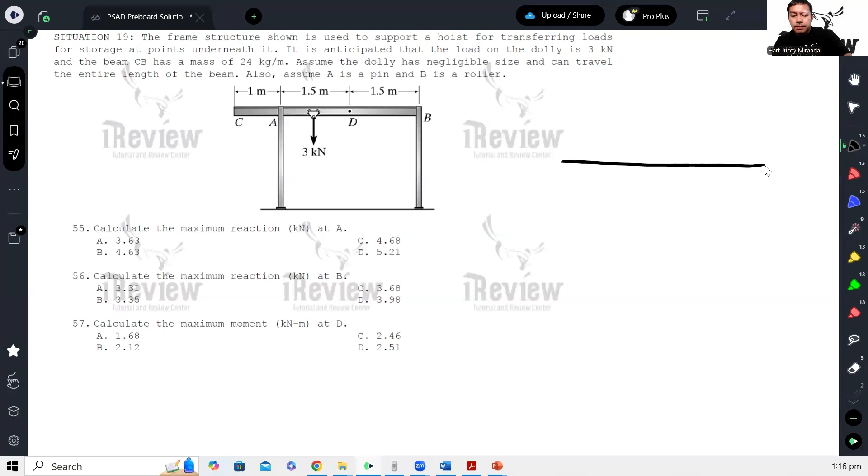So here we have two options. Actually, if you look at the problem, it's very simple. It's just a simply supported beam with an overhang. So let's make this a pin, this a roller. This is A, this is B. The 3 kilonewton load can travel anywhere, so let's place it here for now. We also have to take note that the beam CB has a self-weight.

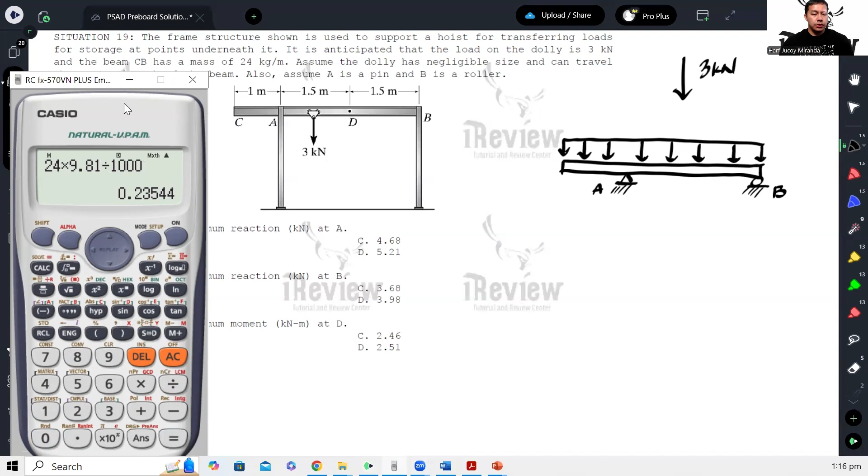That self-weight of 24 kilogram per meter, being a self-weight, should act all throughout the span. So this is 24. Let's convert this to kilonewton per meter: 24 times 9.81 over 1000, which gives us 0.235 kilonewton per meter.

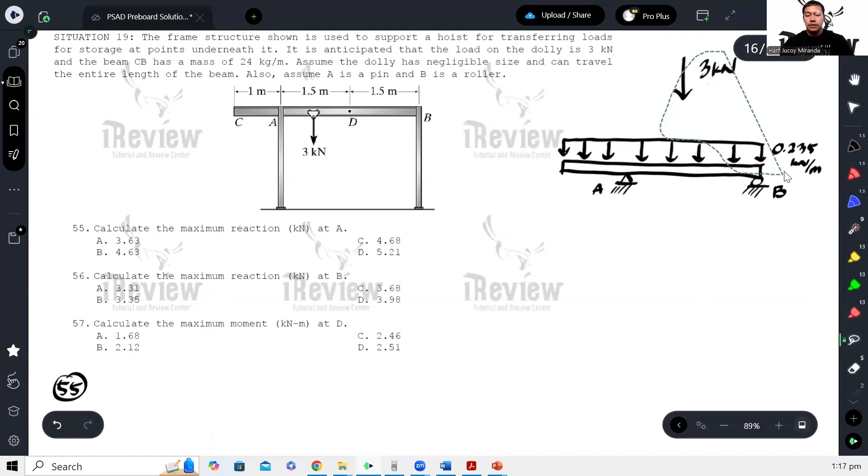Now, calculate the maximum reaction at A — this is for number 55. For the maximum reaction at A, we need this 3 kilonewton load placed directly at A. I'll do this without the influence line for now. To make this maximum, the 3 kilonewton load should be placed right at A, so we're sure we produce the maximum reaction at A there.

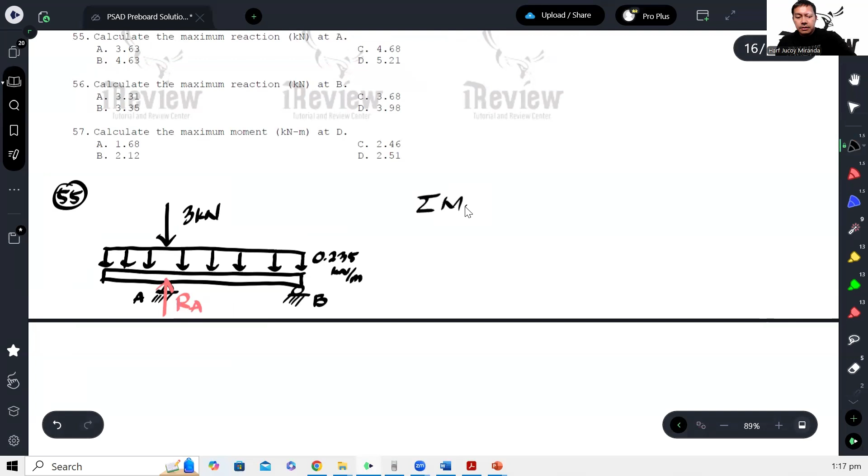So how do we calculate the reaction at A? We can take moment at B. Summation of moment at B equals 0, assuming counterclockwise positive. That would be 0.235 times the full length, which is 4 meters, times its moment arm — the resultant is at the middle, so 2 meters from B. Plus 3 kilonewton with moment arm 3. And then minus reaction at A with moment arm 3 also, equals 0. From here we can calculate the reaction at A.

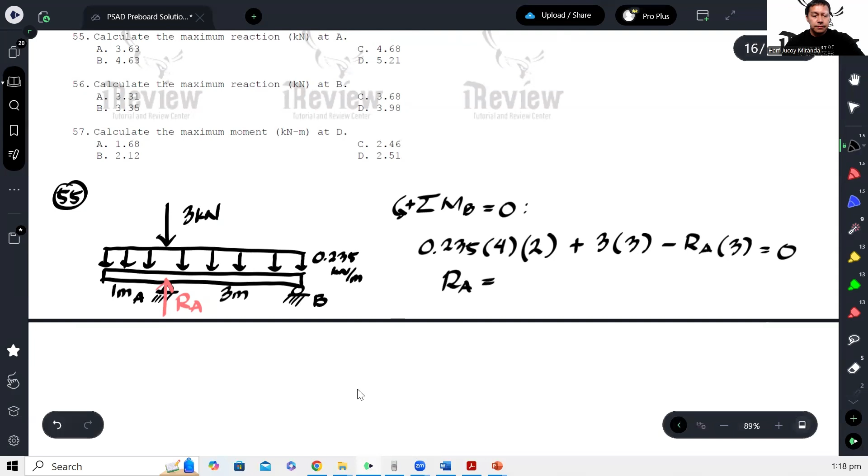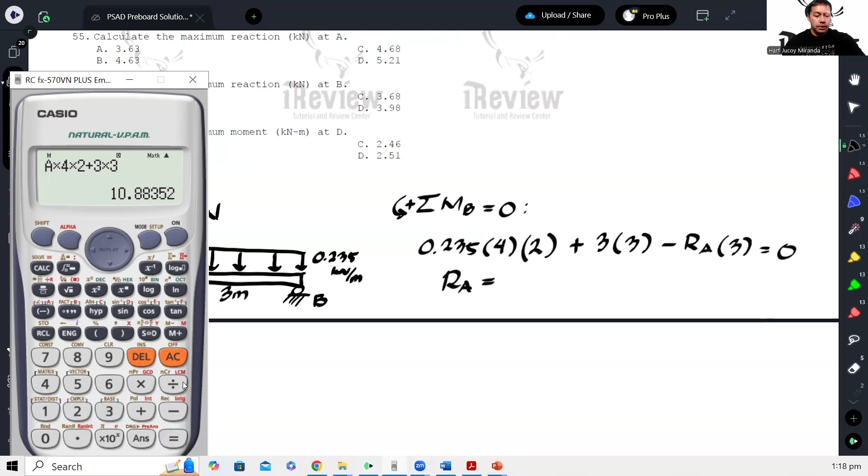So that's 0.235 times 4 times 2, or let me just store this. Store it as A: A times 4 times 2 plus 3 times 3, over 3. That gives us 3.63 kilonewtons — that is the maximum reaction at A.

Now if you're curious, what if I want to use the influence line instead? That's also possible. The influence line for the reaction at A — I discussed this in a different video, please check that, or I'll tag it here. Anyway, for simple supports, the reaction at the ordinate of the influence line for that specific location is always 1, and at the other support it's always 0. Then you connect the two, and if there's an overhang, you just extend the line.

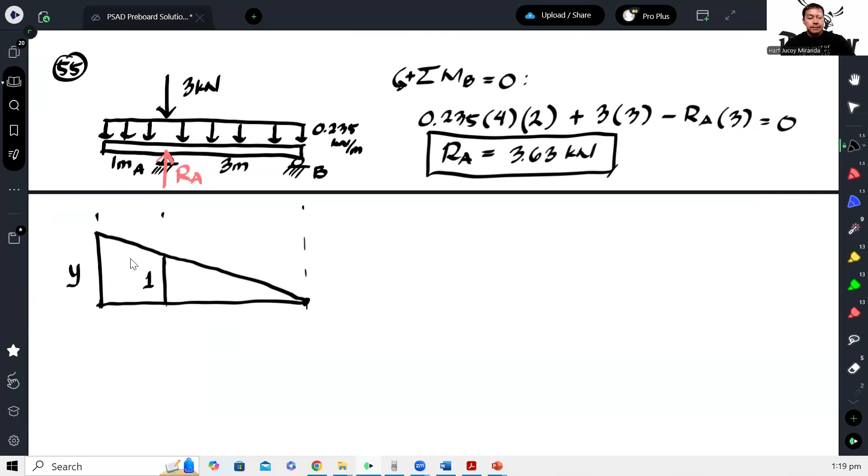So you'll have another ordinate here, let's call it Y. To calculate the maximum reaction at A, we multiply the 3 kilonewton by 1, plus the uniform load multiplied by the area of the influence line — so we need this Y. Here it's 1, here it's 3, so Y is to 4 as 1 is to 3. Solving, Y equals 4/3. So the area is 1/2 times 4/3 times 4, then multiply by 0.235. Computing this should give us the same answer.

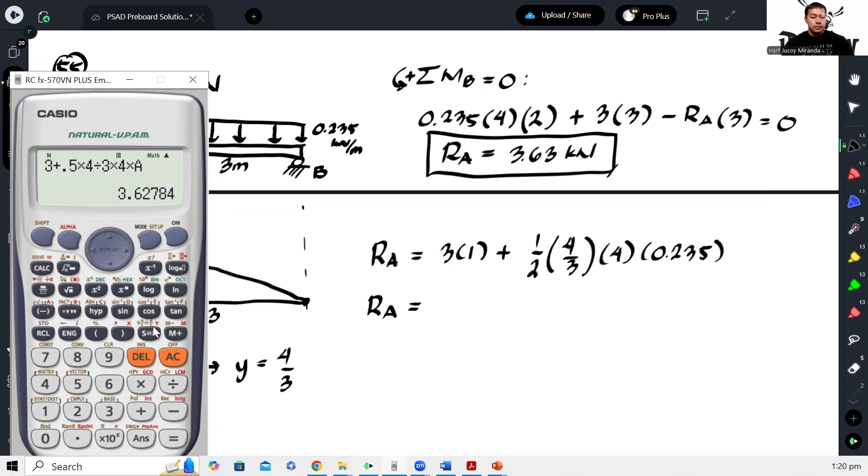That gives 3.63 kilonewtons — same as before. That's if you want to use the influence line, but it's the same result.

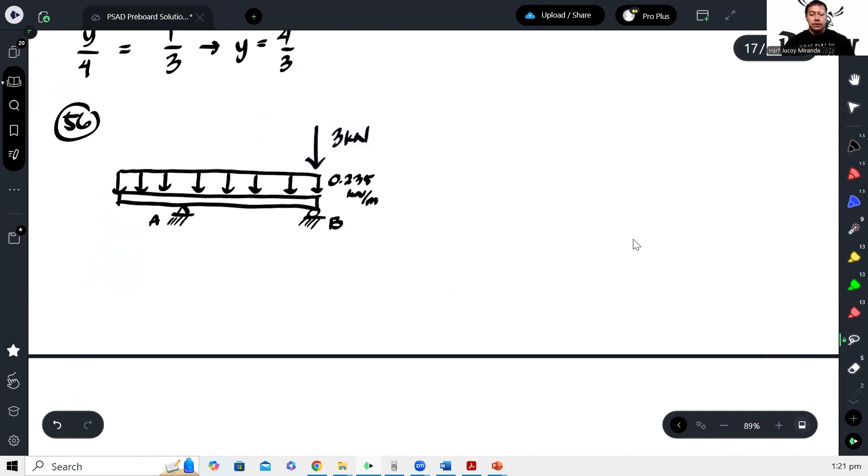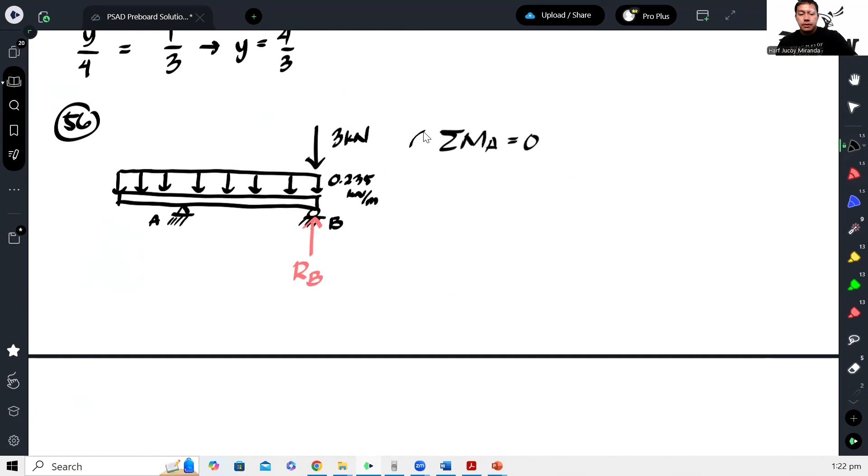Suppose we don't use the influence line. We take summation of moment at A equals 0, assuming counterclockwise positive. We have 3 kilonewton times 3 meters — the rotation is clockwise. Then the uniform load: 0.235 times 4 meters, times the location of the resultant which is at 2 meters, since 4 is the total length, 2 meters from both ends.

But there's already a 1 there, so the moment arm here is actually just 1, and the rotation is clockwise, so negative. Then the reaction at B has a moment arm of 3, and the rotation is counterclockwise. All of this equals 0, and from here we can calculate the maximum reaction for B.

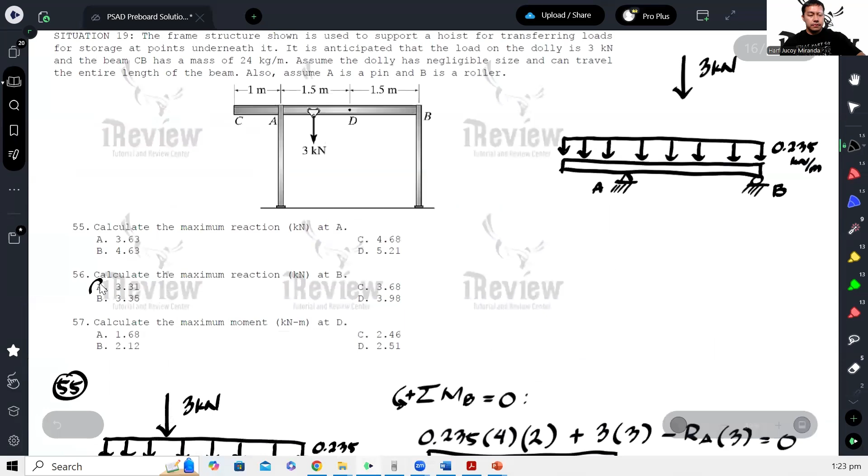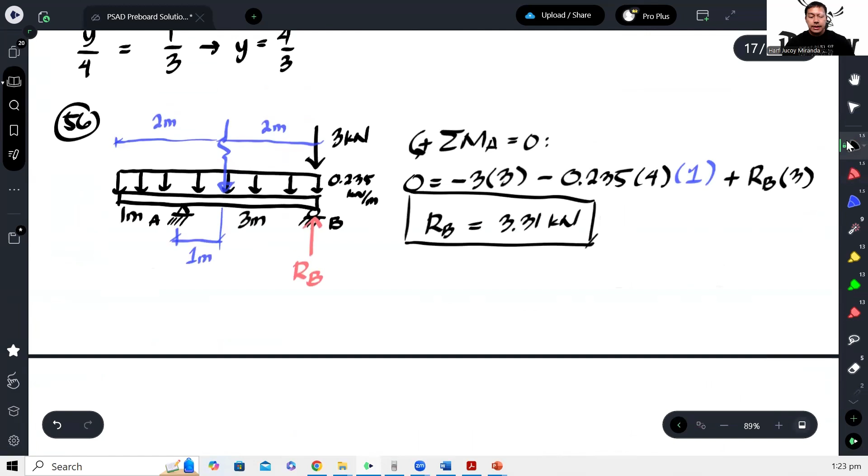Okay, so now what about if I want to use influence line? So ganun ulit, kung nasaan yung point na hinahanapan mo, ang ordinate doon ay 1. Tapos sa kabilang support, 0. Tapos i-extend mo lang yung line kung meron overhang.

So meron ko dito ulit y. This is 3 meters, this is 1 meter. Tapos alam naman natin na yung 3 kilonewton, itatapat natin dito sa 1. Diba? Ito dapat yung itsura niya. Tapos ito yung wag niyong gagawin.

Ano, baka kasi nasanay kayo na yung binigay na uniform load is highway load. Ibig sabihin kapag highway load, ano siya? Moving load din siya na uniform load, ibig sabihin live load siya. Pero ito kasing uniform load na to ay hindi naman live load, siya ay dead load, so ibig sabihin self-weight. Ibig sabihin hindi yan lilipat, wala kang option to move it at any point along the beam. It is always present, it is permanent to the beam kasi bigat niya yon.

Kaya ibig sabihin kung gagamitin natin si influence line, etong uniform load na to will be at the entire span. Tapos yung i-multiply natin na area is ito, which is positive. And ito naman, negative.

Kumbitin muna natin yung y. So yung y ay y is to 1 equals 1 is to 3. So ibig sabihin yung y natin is 1/3. Okay, so therefore our RB will be equal to, unahin na natin yung 3 kilonewton, 3 kilonewton times ordinate na 1. And then plus, ito munang positive area.

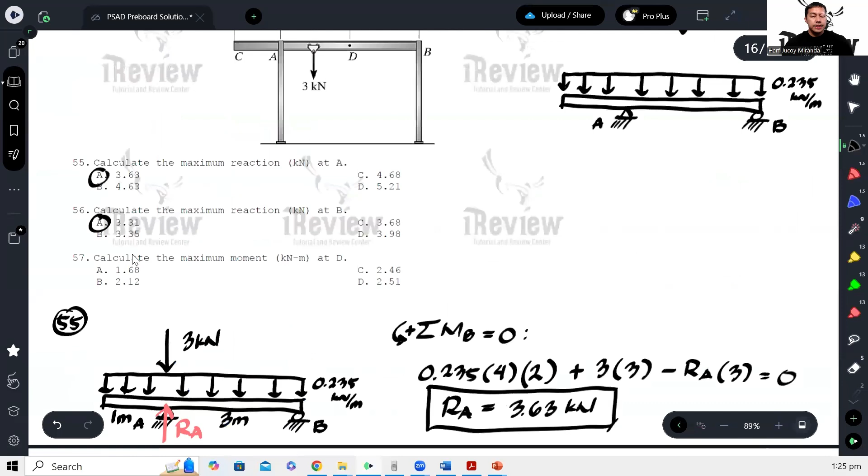Baka kasi ganito ang gawin nyo. Kapag ginawa nyo yan, 3 plus 1/2 ng 3 times yung A, ang lalabas na sagot iba, no? 3.35. At kung hindi kayo maingat, nasa choices yun. Okay, so bakit mali yun?

Kasi nga hindi mo naman pwedeng, wala ka namang option na dito, hanggang dito lang yung uniform load mo, hanggang dito lang sa positive. Kasi ito ay dead load, no? Permanent load yan, so hindi yan pwedeng lumipat-lipat. Okay, kaya ibig sabihin dito, isama natin yung negative na area.

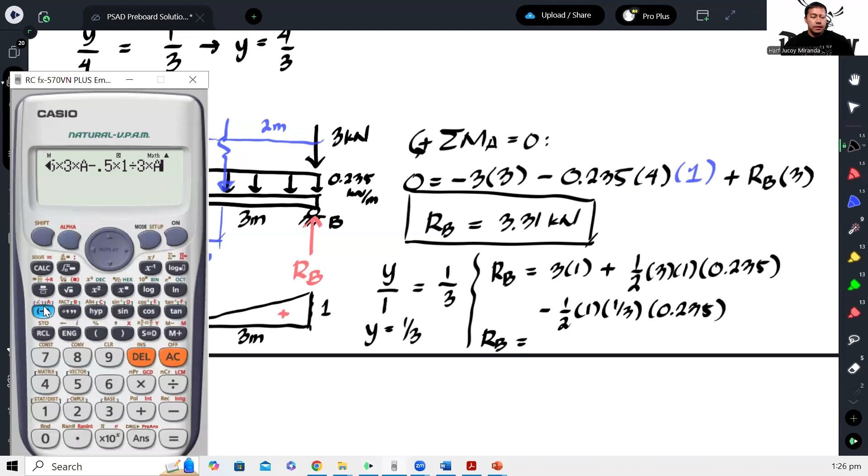1/2, ang base ay 1, ang height ay y, which is 1/3, and then times yung 0.235. So dito lalabas na reaction, dapat same lang dun sa ginawa natin kanina. So minus 0.5 ng 1/3 ng A. Okay, so 3.31, so same lang yan.

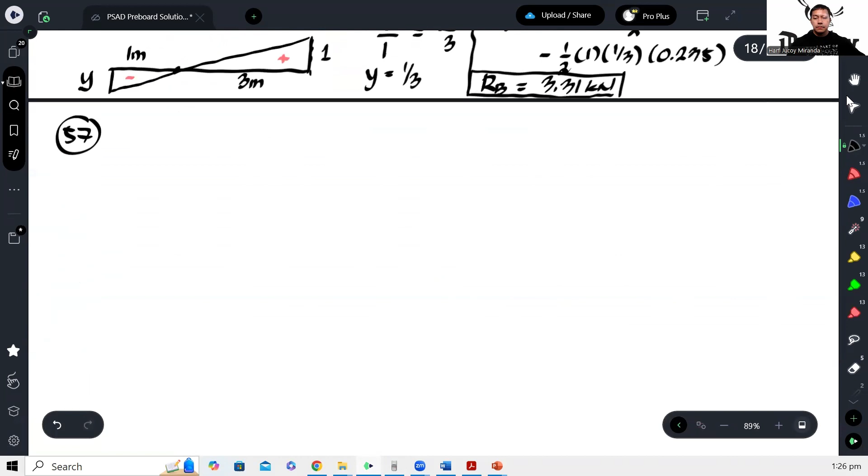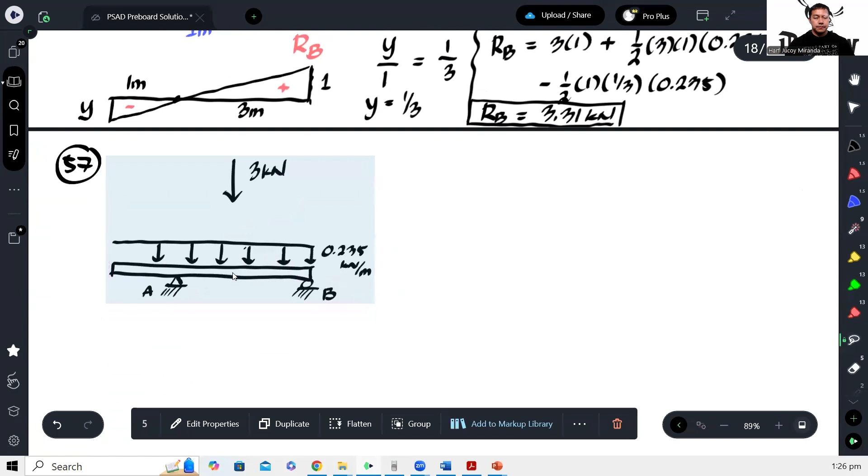Okay, finally, number 57. So number 57, the question is, calculate the maximum moment at D. So yung D ay nasa 1.5 meters from both supports. So nandito yung D.

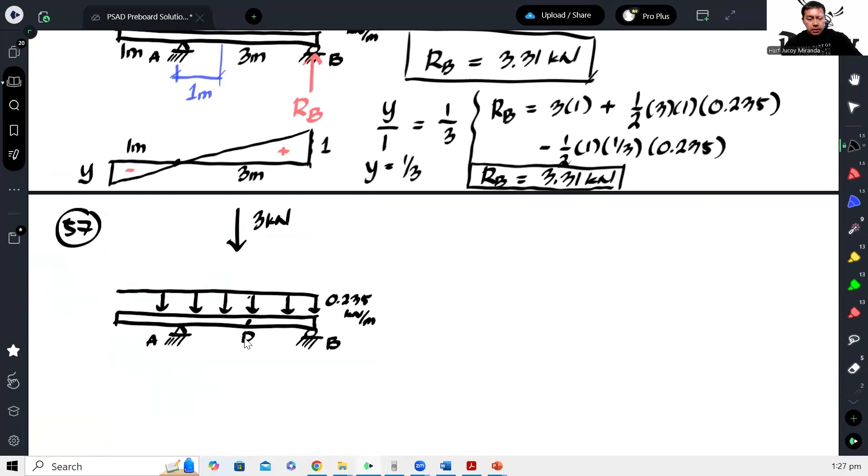Okay, so hanapin daw natin yung maximum moment naman. So dito, pwede pa rin natin gawin yung kanina kung saan kailangan natin isipin saan ipoposition yung 3 kilonewton para ma-produce yung maximum moment sa D. And obviously, ipapatong mo yun actually kung nasaan mismo yung point, no? Pero kung gagamit naman tayo ng influence line, pwede rin. Actually, dito mas madali kung influence line yung gagawin natin.

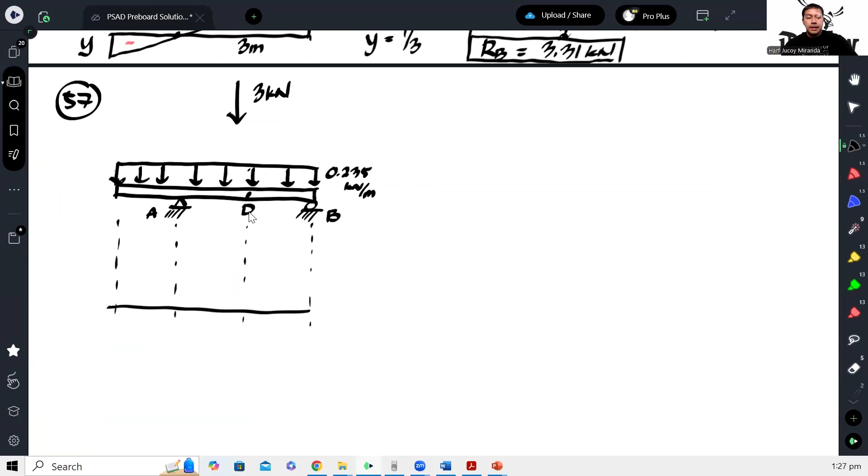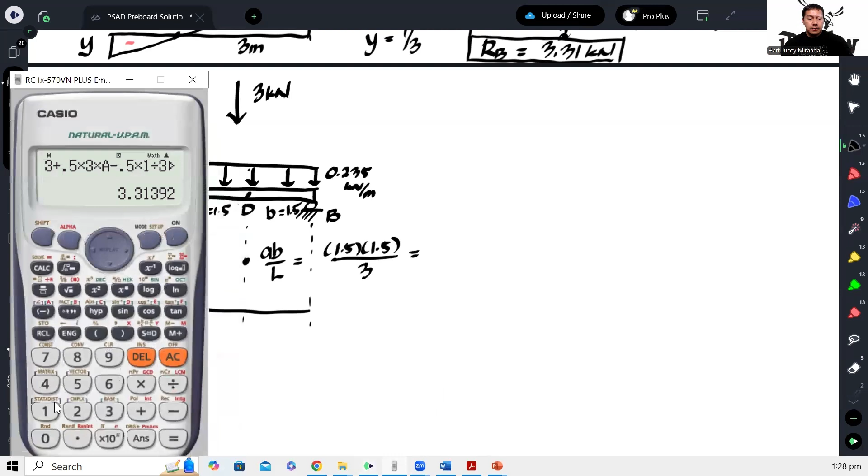Okay, so again, doon sa ibang lecture ko, I mentioned na kapag moment naman at a certain point, palagi na yan ay AB over L. Ibig sabihin ng A, itong distance niya sa left support, which is 1.5. Yung B naman is yung distance niya from the right support. Tapos yung L is yung support to support span, which is yung 3 meters. So we have 1.5 times 1.5 over 3. So this gives me 3/4 or 0.75.

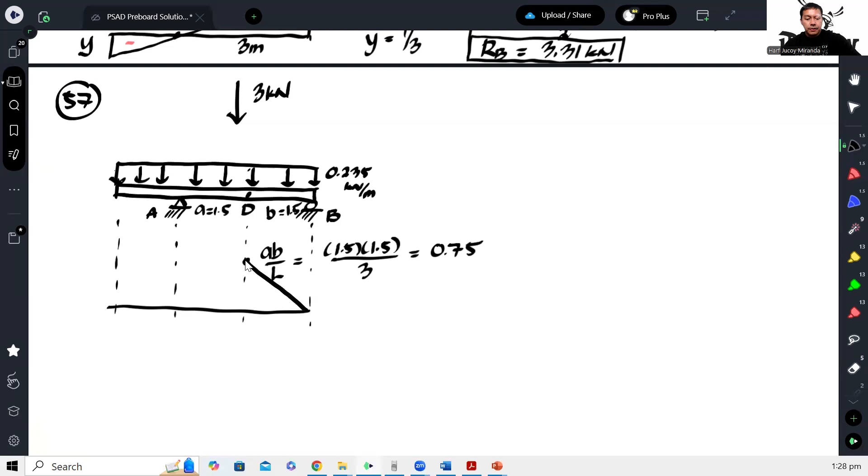Okay, tapos ganito ang itsura lagi ng influence line kapag moment. Kapag ka-simply supported, ganyan lang. Tapos kapag may overhang, extend mo lang yung linya kung saan may overhang. Okay, so tawagin natin to na ordinate y. Ganun ulit, kailangan ulit natin malaman yung y na yan. So mag-ratio and proportion na lang tayo gamit itong triangle na to.

Tsaka ito, okay, so again, this is 1.5. 1.5, and then this is 1. By ratio and proportion, we have y is to 1 equals 0.75 is to 1.5. Okay, so therefore y is 0.5. Tama, no? 0.75 over 1.5. Ayan, 0.5.

Okay, so ibig sabihin dito natin ipoposition si 3 kilonewton sa may pinakamalaking ordinate, which is nandun mismo sa D. Okay, so therefore, the maximum moment at D using the influence line would be 3 times 0.75 plus, okay, ito ulit yung positive area.

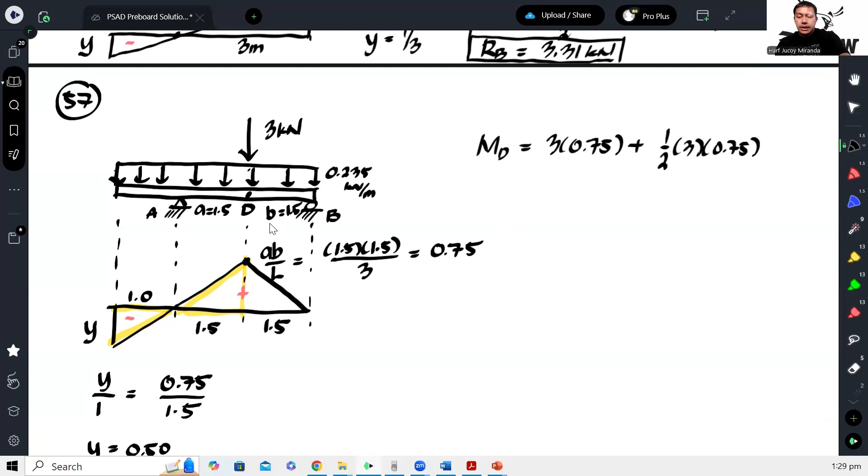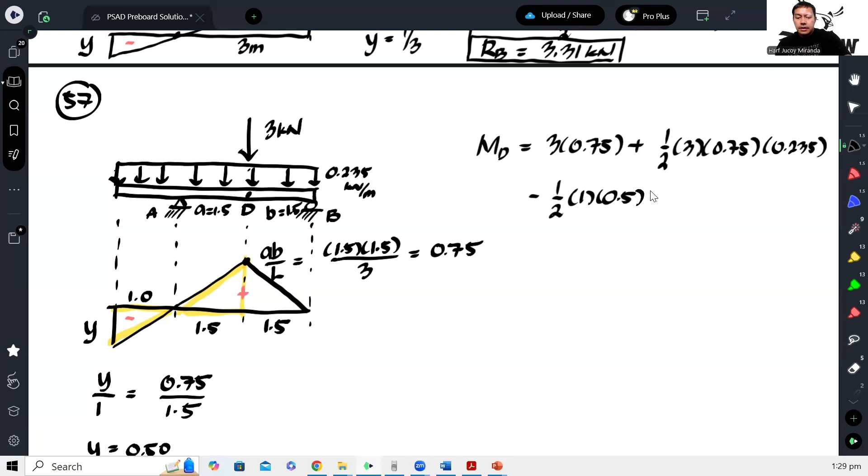Ito ay negative area. Okay, so para doon sa positive area, we have 1/2, base is 3, height is 0.75. Tapos yung uniform load na 0.235. Okay, and then minus yung negative area, 1/2 base is 1, height is yung y, tapos yung uniform load. And that should give us our maximum moment at D.

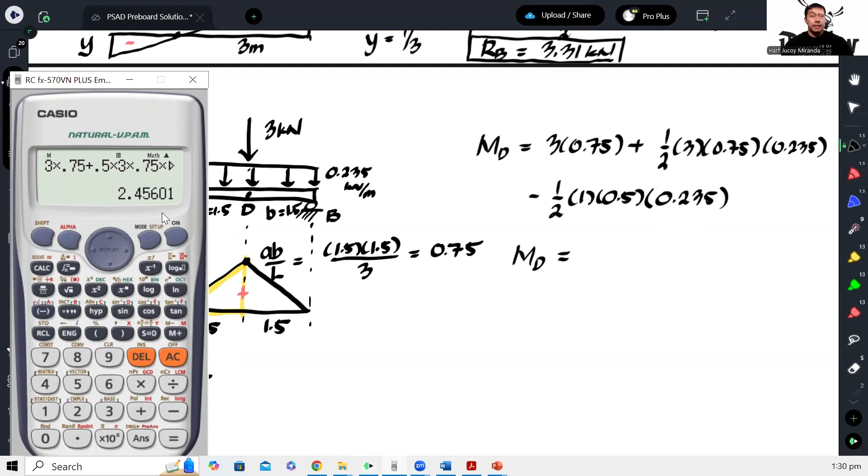So 3 times 0.75 plus 1/2 times 3 times 0.75 times yung uniform load, minus 1/2 times 1 times 0.5 times yung uniform load. So the maximum moment at D is 2.46 kilonewton meter.

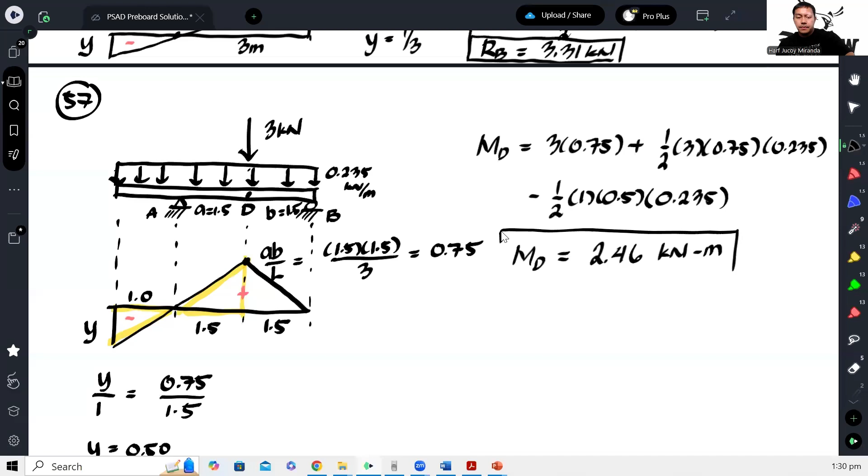So answer is letter C. All right, so that is how we solve this problem.